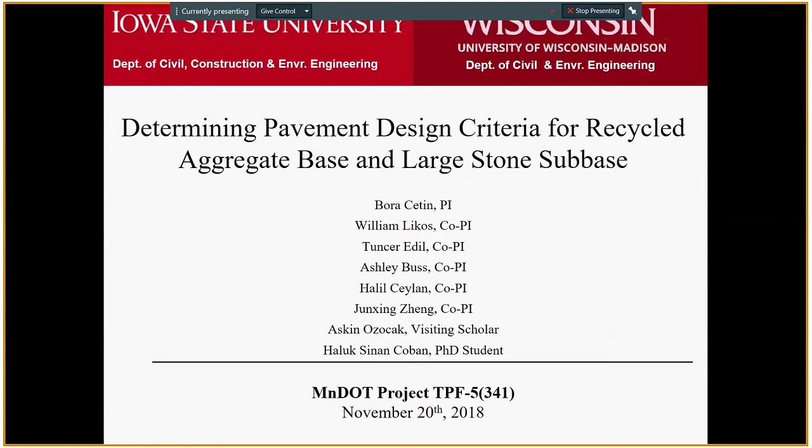Okay. All right. Thank you very much, Ben, for the introduction, and thank you very much for everybody being available. So our project is determining pavement design criteria for recycled aggregate base and large stone subbase. This is a project that started almost a year ago. By December, it will be almost a year.

This is a collaborative work between two institutions, two universities, and of course also with the NRRA group. At Iowa State University, I'm the PI of the project, Bora Cetin, and I have 3 co-PIs, Ashley Buss, Dr. Ceylan, Dr. Zheng, and our PhD student Haluk Sinan Çoban is working with us. At University of Wisconsin, we have 2 co-PIs, Dr. Likos and Dr. Edil, and currently, a couple of months ago, we also have a visiting scholar from Sakarya University working with us on this project. Again, we would like to appreciate the support of the NRRA members, our agency partners, and industry partners. We really appreciate your support and also being able to fund this project.

This is a brief outline of our presentation today. I will try to be as fast as possible. We collected a lot of data, and we'll try to digest all of that in 20-25 minutes, hopefully in 20 minutes. So we will talk about the objectives and why this research was necessary, what we have done so far, a summary of the results quickly, and what we have been working on currently.

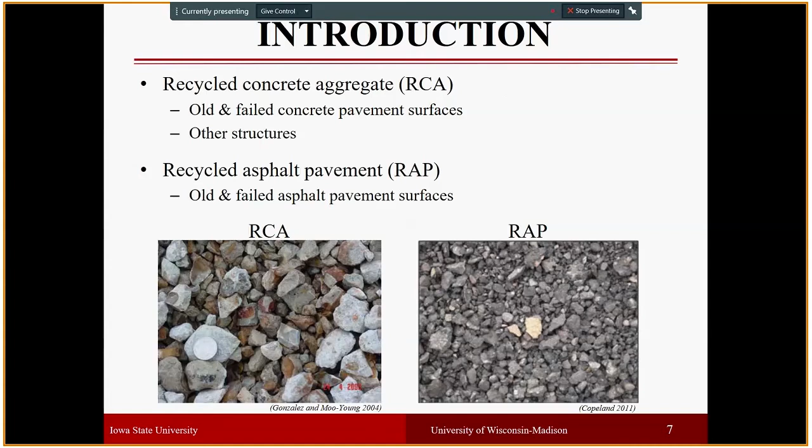Recently, over the last decade or two, large stone subbase has become of interest, especially as a subbase layer. There are currently 3 DOTs with some sort of guidelines for this: Idaho, Illinois, and Wisconsin DOTs, providing guidance on how to use large stone subbase materials. The size of these materials ranges from 3 inches to 6 inches, but there are some particles as big as 1 foot in diameter. One of the main advantages is that energy consumption decreases significantly, requiring less crushing operation as opposed to regular conventional aggregate or recycled concrete/asphalt pavement aggregate crushing processes.

As a part of this study, we had 2 tasks. Task 1 was the literature review summary, and task 2 — well, we have a total of 8 tasks.

The first 2 tasks were literature review and tech transfer preparations for recycled concrete aggregate, recycled asphalt pavement, and the large stone subbase.

Overall in the literature, the summary showed angularity of the RCA was higher, while hydrophobicity and permeability for RAP materials, recycled asphalt pavements, were higher than RCA materials.

In terms of stiffness and strength, RCA and RAP — in terms of stiffness — either provide performance equal or superior to virgin aggregates.

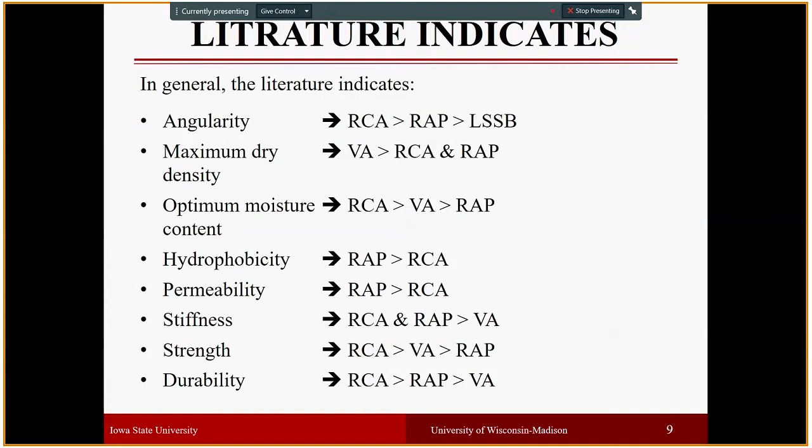I'll be happy to provide more detailed information later if there are further questions on the literature side. So the research motivation was the variability and uncertainty of these RCA and RAP materials.

It really changes from location to location, so it always requires more analysis and tests. As for limitations, large stone subbase has been studied by previous researchers, but there are still limitations because of the size.

Lab tests cannot really be conducted on these materials, and there are some inconsistencies with the design methods and construction specifications between agencies or even contractors working in this area.

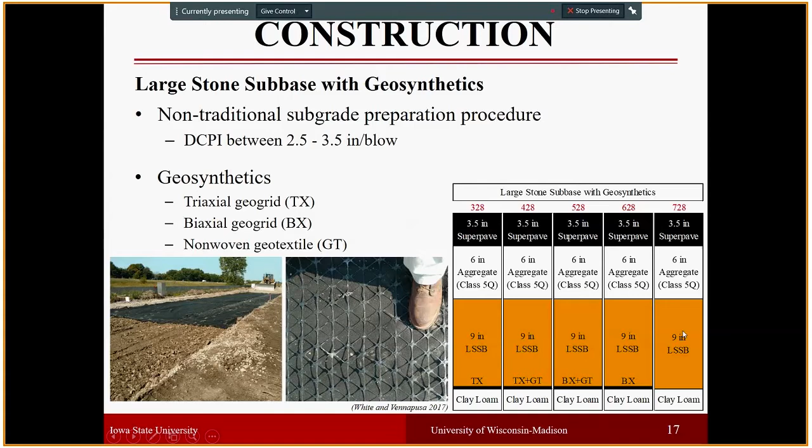We have 2 identical test sections with large stone subbases at a height of 18 inches. 4 of the large stone subbase test sections have geosynthetics installed between the subgrade and the large stone subbase layers. TX is the triaxial geogrid, GT is the nonwoven geotextile, and BX represents the biaxial geogrid. So we have sections built with triaxial geogrid and biaxial geogrid only, and combinations of these geosynthetics. The last cell has a 9 inch thick large stone subbase with no geosynthetics.

Majority of the sensors are placed in the recycled concrete aggregate bases. Cells 185 through 189 are all recycled aggregate base test sections, and we have one on the large stone subbase at the end of the geosynthetic test section. The sensors are placed on the outside lane, not the inside lanes, and we have thermocouples placed all the way up to 70 inches, which is almost 6 feet depth.

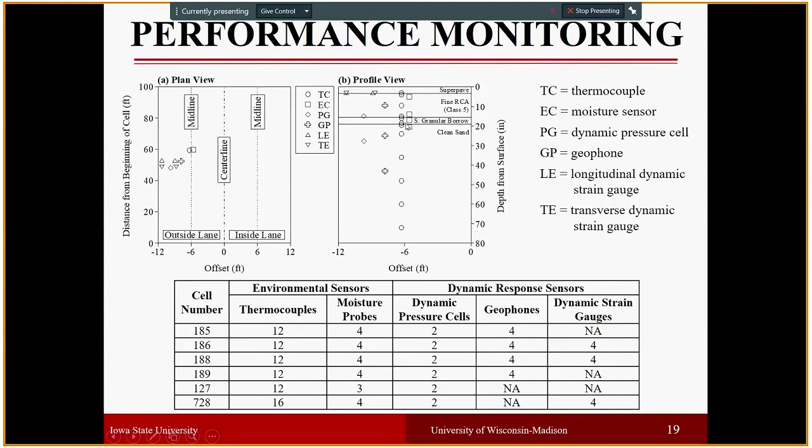The data collected so far for test 3 during construction includes nuclear gauge density data, moisture content data, DCP, lightweight deflectometer results, gas permeameter results, intelligent compaction data, and falling weight deflectometer data. I will summarize those results for the group here.

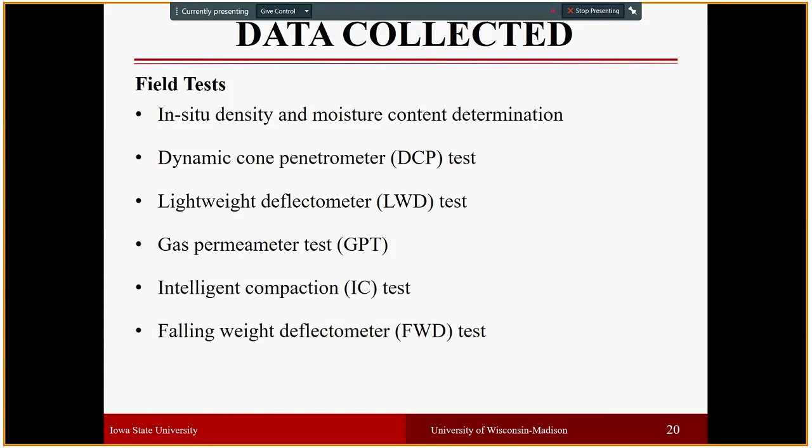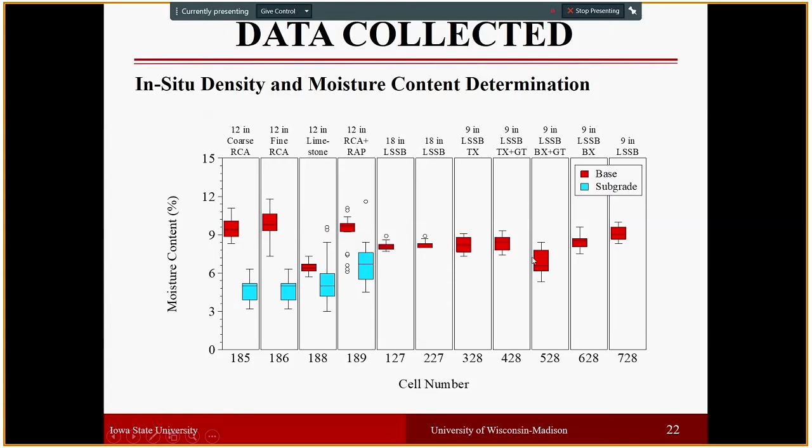For the moisture content values, the RCA-based materials tend to have higher moisture content during construction, and subgrades were compacted at lower moisture content values. The base layers on top of the large stone subbases have very close, or slightly lower, moisture contents than the RCA test sections.

We have gas permeameter test data which gives us an idea about the permeability of the base layers of each test section. Coarse RCA, as expected, had higher permeability. On the other hand, fine RCA and the Class 5Q conventional aggregates placed on the large stone subbase test sections have the lowest permeability, which is also expected.

Conventional limestone class 6 and RCA+RAP are a little bit lower than the coarse RCA and fine RCA, but they provide almost identical stiffness to the 12-inch and 18-inch thick large stone subbases. We see a slight decrease in base stiffness on the large stone subbase test sections with geosynthetics.

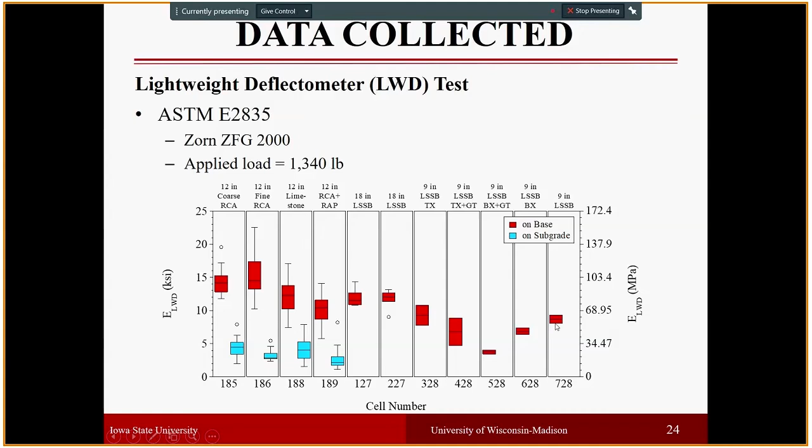The intelligent compaction data was collected by Ingios and the University of Texas at El Paso and shared with us. After the preliminary IC mapping occurred, on top of the cyclic stress-dependent resilient modulus, an automated plate load test was conducted on the test sections at different plate contact stresses.

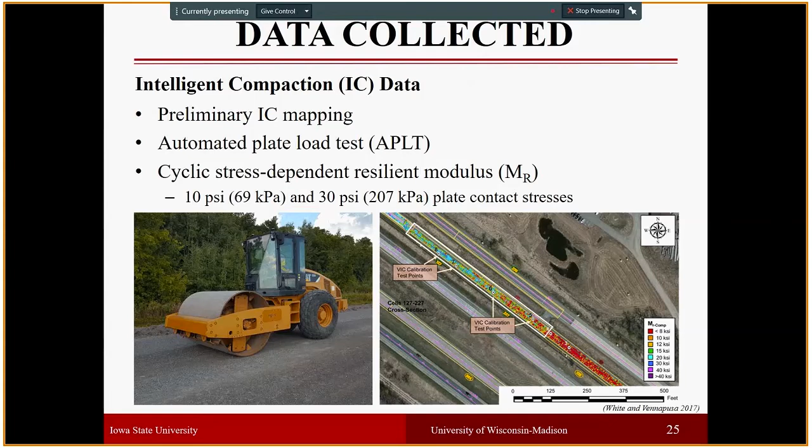The analyses were done in two ways: one composite, and one layered. In the composite analysis, we assume the entire base, subbase, and subgrade layer as one composite layer. With the layered analysis, we calculated base and subbase stiffness and subgrade stiffness separately. In the composite results, shown in white boxes, base and subbase are in red boxes, and subgrade resilient modulus data are shown in blue boxes.

Again, regardless of the analysis type we saw, the LWD results showed that the test sections built with coarse RCA and fine RCA had the higher resilient modulus values. The 18-inch thick large stone subbases, especially cell 127, provided the third highest performance in terms of resilient modulus. Class 6 conventional aggregate and the RCA+RAP mixes were very identical in their comparisons.

The large stone subbases with geosynthetics performed relatively lower, providing lower stiffness.

One thing we wanted to point out, consistent across LWD, FWD, and intelligent compaction data, is that to really see the benefit of geosynthetics you need FWD or these resilient modulus, APLT, and LWD tests. But the load we apply is not adequate to truly see the contribution of the geosynthetics, so we don't want anyone to conclude geosynthetics didn't really contribute.

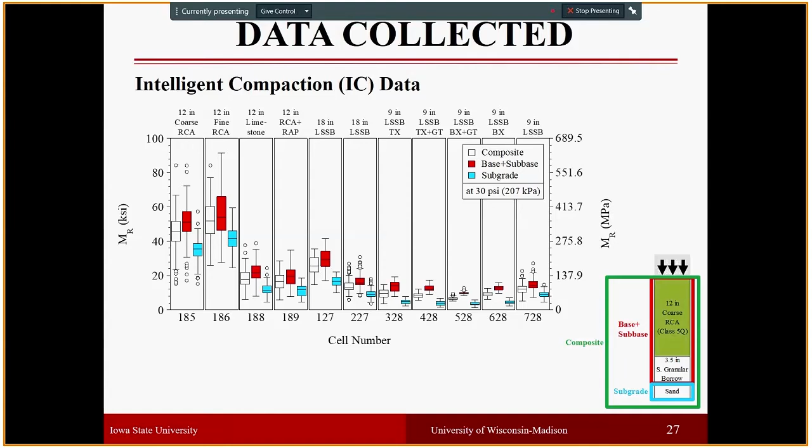In fact, geosynthetics really contributed during the construction stage, because the subgrade was too loose and geosynthetics held the large stone subbase layers pretty well intact. But to see the real contribution of these geosynthetics, we need to apply much higher loads than what FWD, automatic plate load test, or LWD tests can apply.

For falling weight deflectometer testing, thanks again to the MnROAD test facility, they have been conducting and collecting this data for us. There are different loading steps for before paving and after paving. Before paving, we did the composite analysis and also layer by layer analysis, and we conducted FWD analysis both for semi-infinite and depth to rock or water table analysis.

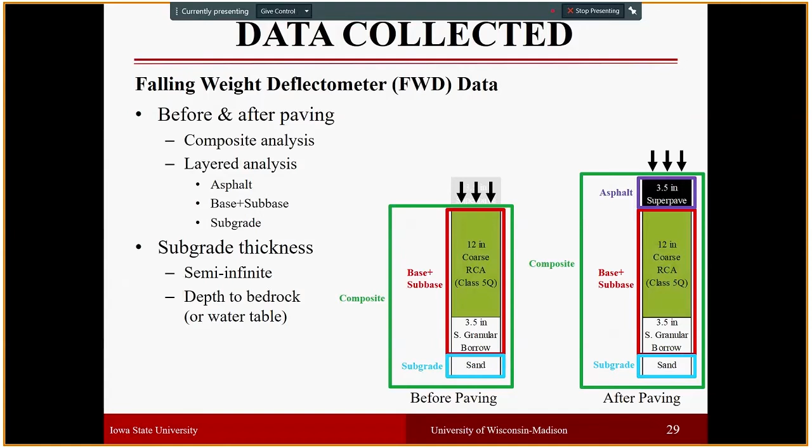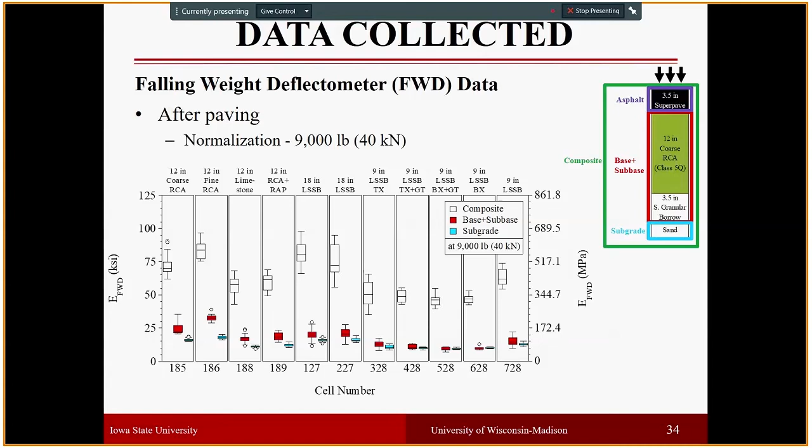Overall summary: as I described, the GPT gas permeameter test results for permeability showed coarse RCA and RCA materials overall, except fine RCA, had the higher permeability.

In terms of LWD results, fine RCA and coarse RCA were the highest, providing more stiffness than the class 6 limestone material and the 18-inch large stone subbases. The 9-inch large stone subbase test sections provided lower stiffness.

When we come to the APLT, intelligent compaction resilient modulus data, and the FWD elastic modulus data, the results compared to LWD and between IC and FWD were consistent. Fine RCA and coarse RCA provided the highest stiffness. Thicker large stone subbases performed better compared to RCA+RAP mix test sections and limestone class 6 and class 5 test sections.

The 9-inch thick large stone subbases with geosynthetics seem to have lower stiffness initially, but the paved results show it may perform superior or equal over time. Task 5 and task 6 will provide good information on that for us.

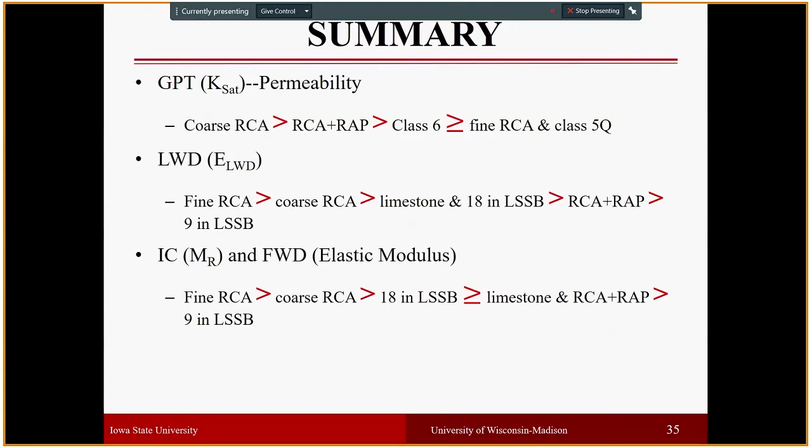Currently we are working mainly on task 4, and we are collecting the data from the MnROAD test facility for the field test results.

At Iowa State University, our main focus is on the index properties listed here, and at University of Wisconsin-Madison, we are focusing on the soil water characteristic curve and hydraulic conductivity values.

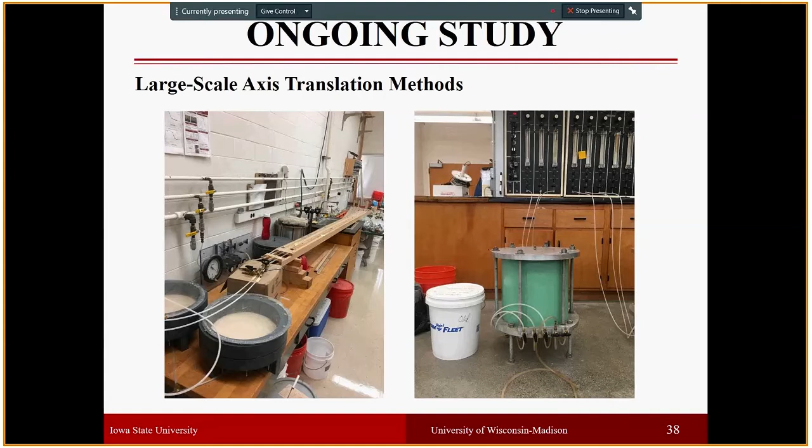This is a picture of the water retention characteristic curve tests. These are the pressure plates that will be used for some of the finer materials, like fine RCA and subgrade materials collected from MnROAD test facilities.

This is a specially modified permeameter to run constant head tests on large size particles like coarse RCA or RCA blend mixtures, which doesn't allow head losses to happen a lot.

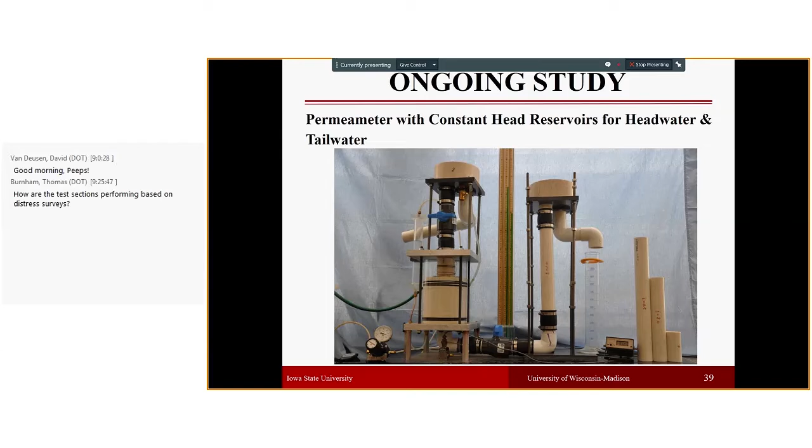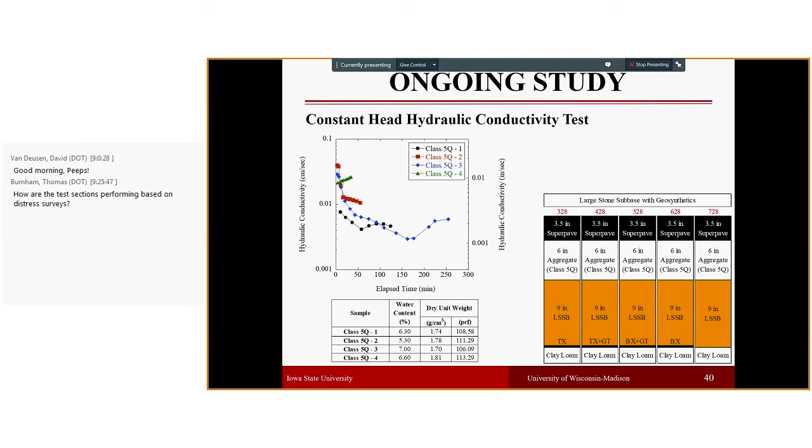So it provides really reliable permeability test results. In Wisconsin, we've finished the class 5Q permeability test results, and as you can see, the hydraulic conductivity of these materials ranges from 10 to the minus 2 centimeters per second to 5 times 10 to the minus 2 centimeters per second.

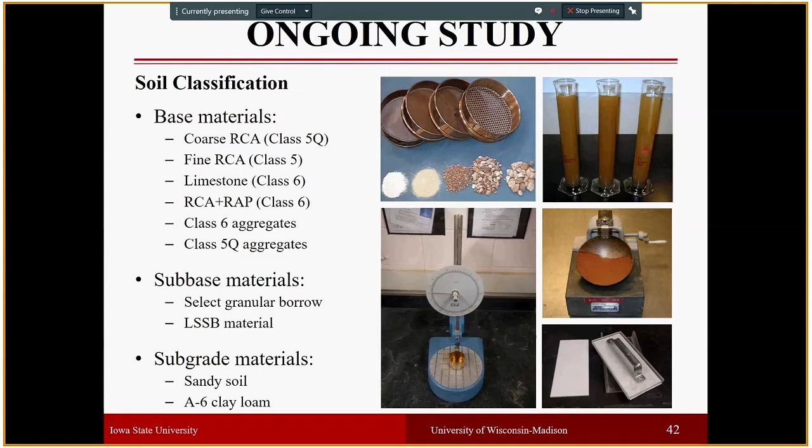We are almost done with the standard gradation tests for the materials we collected, and we're starting to do some image analysis, especially for the large stone subbase test sections first, to determine their gradation.

We are going to calculate the angularity, roundness, and sphericity of all these aggregate materials that we collected, and we will do both 2D and 3D particle shape analysis.

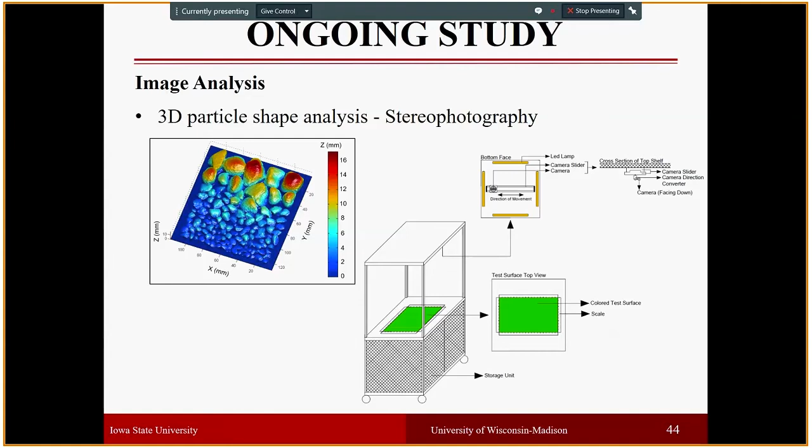This is a schematic diagram of the image station that we modified currently, and we've already started taking pictures. We hope to have that data in a month or two to show to the NRRA team.

Sorry, this is the end of the presentation. I had to go very quickly. I hope it was clear.

No, Bora, you did a great job, especially with all that material you had to cover, so thank you very much. Is there any questions for Bora out there? We've got a couple minutes here.

There's a question online from Tom: how are the test sections performing based on distress surveys? Good question—it's under task 5. We are collecting that data, but we haven't digested or summarized it yet. We are looking into the distress surveys on the pavement surfaces, but we don't have a summary yet.

After driving over this morning, I don't believe there's any cracking in any of those test sections yet. We did have some early issues where the geosynthetic was put down early on in construction, but we don't see any of that coming through right now.

So unless there are any other thoughts on that—any other questions? I guess one question I'd have, Bora, is there anything you've seen so far that's surprising to you, something you didn't expect, or is it all falling in line with what you expect for these two studies?

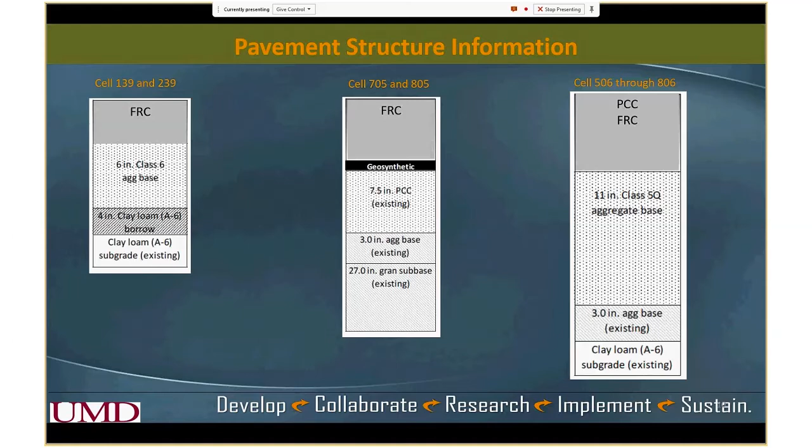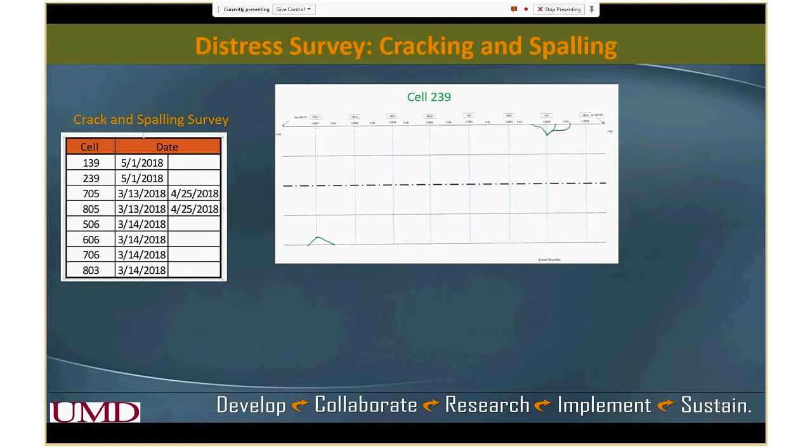When you go out and do some crack survey, and then look for cracks, sometimes you can get bored. You know, for these cells, they only noted some corner cracks, but sometimes you can have fun too.

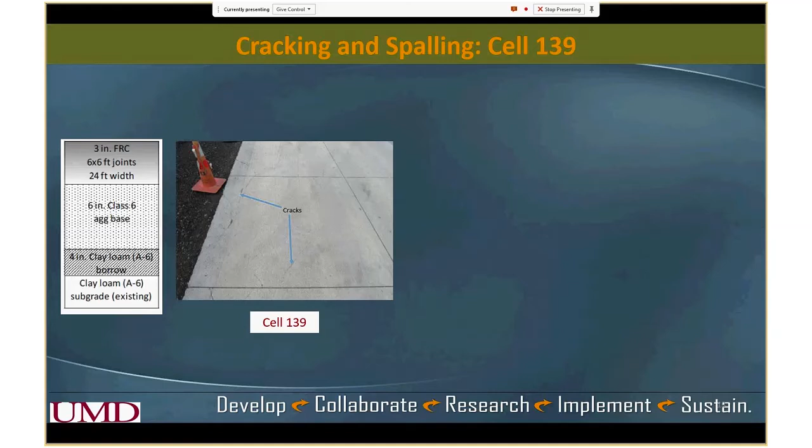So if you click, I can show the picture of the distress that we have seen in cell 139.

I'm showing the broken out area. Do you want another click after this? Yeah.

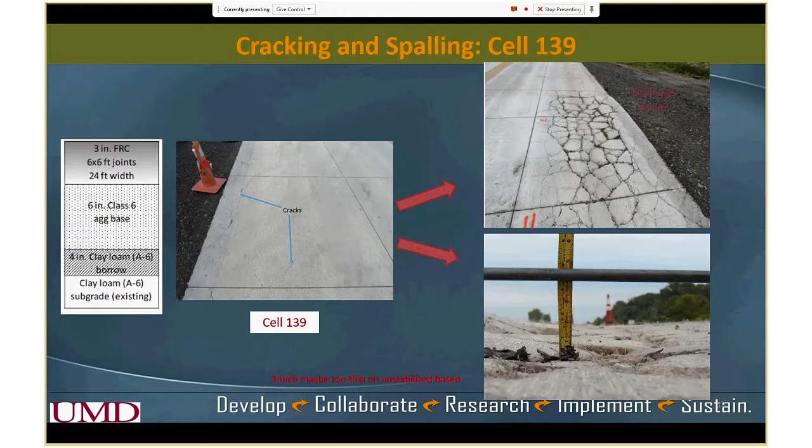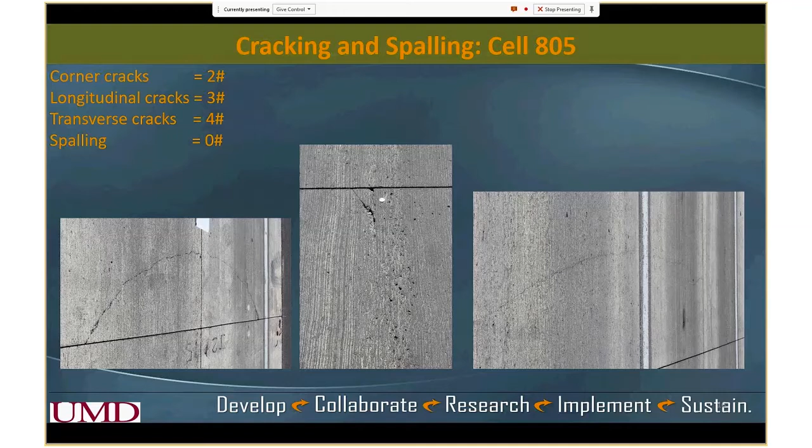All right, so this is kind of the summary. Ben, you can click a couple of times since animation is not working. So this is giving a kind of summary. So you see on 239, which I did not include 139 because that resulted in completely different distress patterns, kind of slab shatter, so I did not include that one here.

So 239, we saw a lot of corner cracks, but otherwise it's performing well. So 705, 805, they're performing kind of equally, although 805, which has a slightly smaller slab, got a little more transverse cracking, but I would still say we have to wait to understand how these perform, whether they perform differently or not. On the right side, that's what I was telling you, on 506, which is plain concrete, this is the only cell which has seen a lot of spalling, 15 numbers of spalling so far.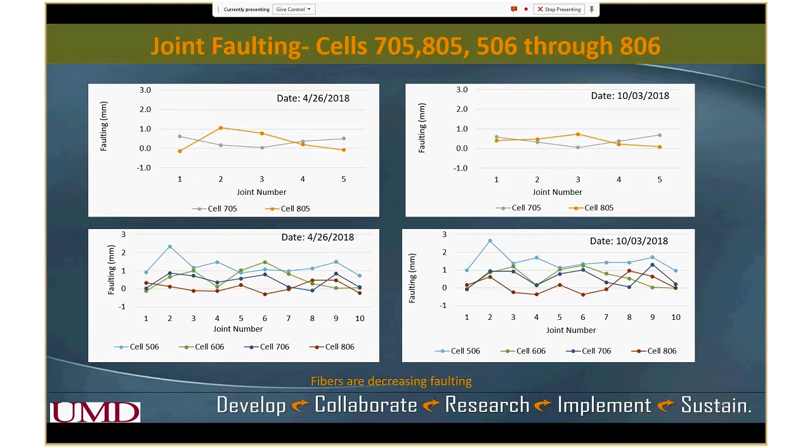Yeah, so I'm not seeing that one, but I think fiber has a great contribution in reducing the faulting. You can see 806 received really less faulting. 606 and 506, 506 which didn't have fiber at all, received higher faulting. Can you go to the next slide, please?

So this is the picture of faulting, and the next click I'm showing the graph of fiber dose versus faulting. You can see there's a kind of clear relationship here. I think this is a very good finding from the first year observation. When we did not have any fiber, we had faulting, although not too much, but with increase of the fiber, we are getting rid of faulting, or faulting is significantly reduced. Next slide please, slide number 23.

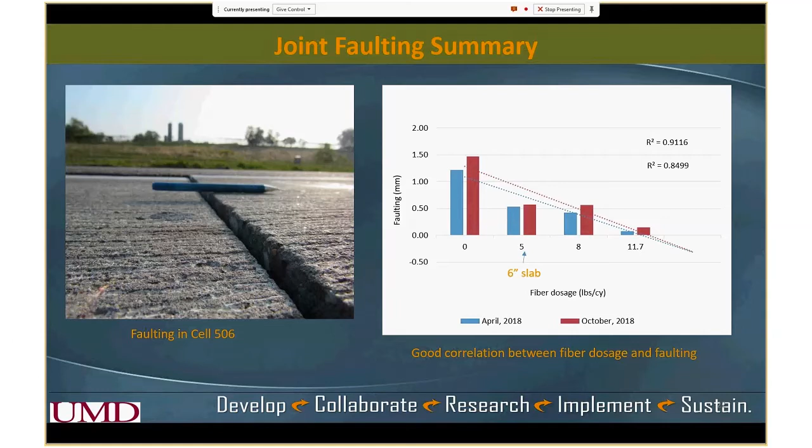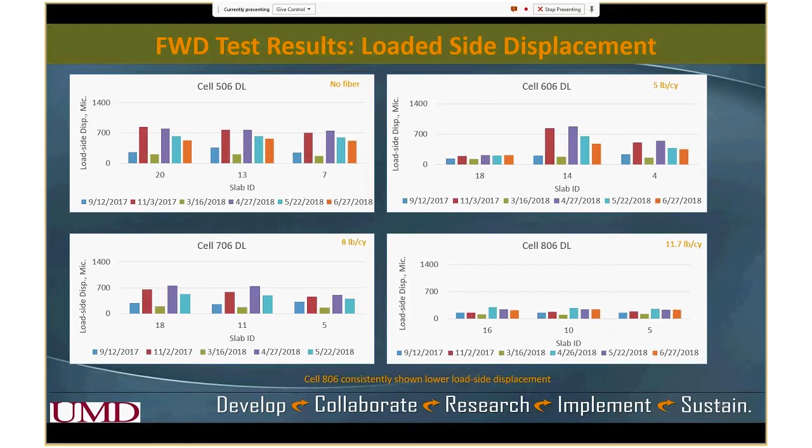Then we have also analyzed the vibrating wire sensor, or basically the strain because of environmental factors, either temperature or moisture. So we've analyzed those, correlating with temperature and all, and we already found very good correlation.

We have also analyzed joint movement data, with respect to the very first data collection day. So how joints are moving, either closing or opening with the temperature - those things we have done.

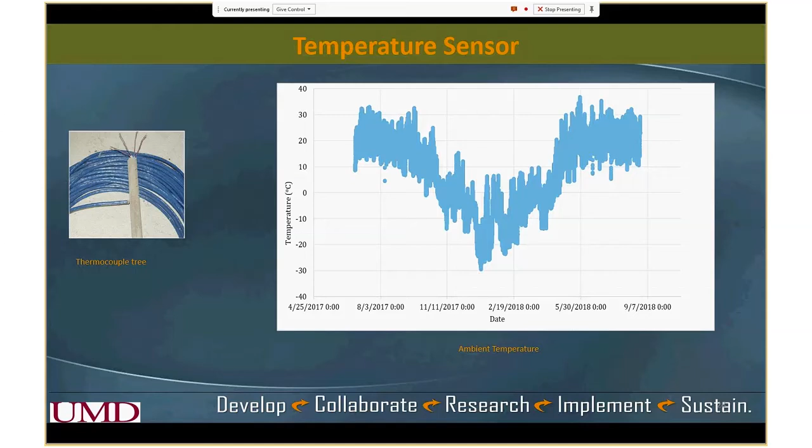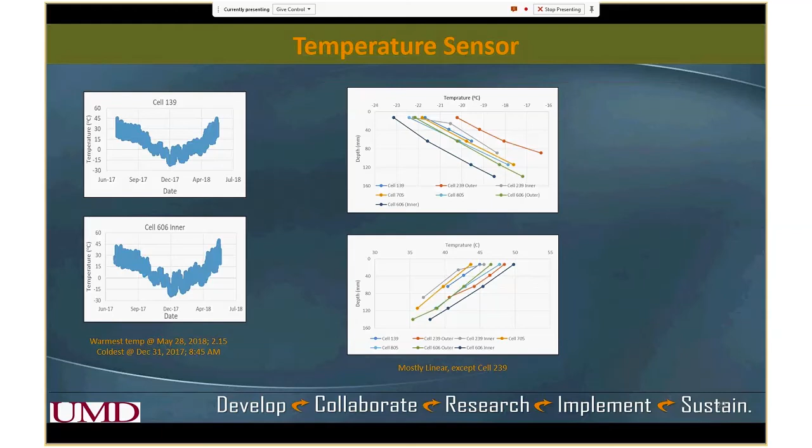We have also analyzed dynamic sensor data to see what kind of stress or strain is occurring in different cells. We're focusing on 139 to see what magnitude of strain or stress it has gotten under the load. We're also investigating some FWD data of cell 139 to find out if there was a void underneath it. I know there was a little drainage issue - the base was not super strong, so that probably also contributed to the failure of this pavement.

All right, I think this is what I actually wanted to discuss. I'm really sorry about this technical glitch, but right now I'm on temperature sensor, temperature gradient, and we got about 2 minutes left.

No, I think you're going to have to go to your conclusions pretty quick. Yeah, go to the conclusion. I already discussed what we have done with respect to the data collections.

Concluding remarks: as you have seen, fibers are really contributing in reducing the fatigue cracking. If you look at cell 806, which has the highest fiber dose, that did not have any fatigue cracking. But one observation is...

Probably the fiber that we used, if we want to use that kind of fiber, we need more of it. The cell which had 5 or 8 pound doses did not perform significantly different than the plain concrete one. But the highest dose, which is 11.7, performed really well. So we might want to try some other fibers too.

And then you have seen the faulting. I'm really happy to see how fibers are decreasing the faulting - that's the information we see from here. Also, the difference between cells 705 and 805, we did not notice a significant difference. We'll have to wait for more data.

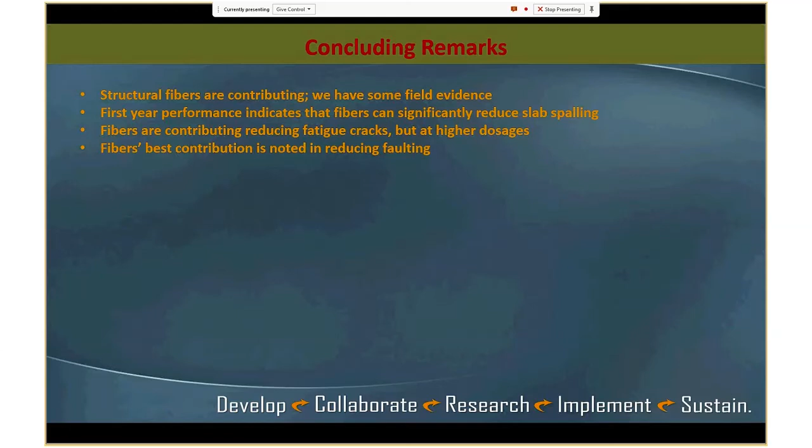So I'll take one or two quick questions, or Ben, whatever you allow. Yeah, quick question, and we got to move on to the next one. So is there any questions, Bob, you see online? There are no questions online. Okay, I think, again, Bora, sorry.

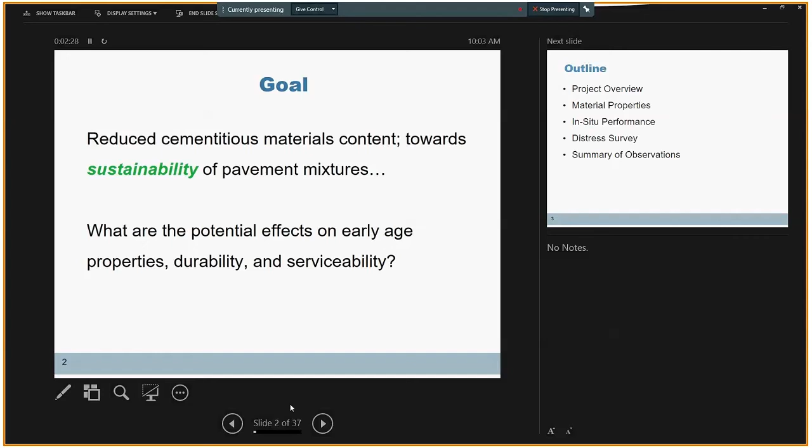Overview of my presentation: I'll give a brief overview of the project to introduce the cells, material properties, and concrete mix designs. I'll cover laboratory data from testing materials, data from in situ testing and embedded sensors, photos and data from recent distress surveys, and a summary and conclusion of the data we have so far.

The test cells we are talking about are test cell number 138 and 238 at the MnROAD facility. We had two experimental cells. Cell number 138 was prepared with 500 pounds per cubic yard of binder.

The second experimental cell, cell 238, was cast with concrete prepared with 470 pounds of cementitious materials per cubic yard of concrete. We call these cells with low and lower cement content.

The data here are compared with cell number 524, which was our reference concrete and reference cell. The concrete used for construction of this cell was prepared with 570 pounds of cementitious materials per cubic yard.

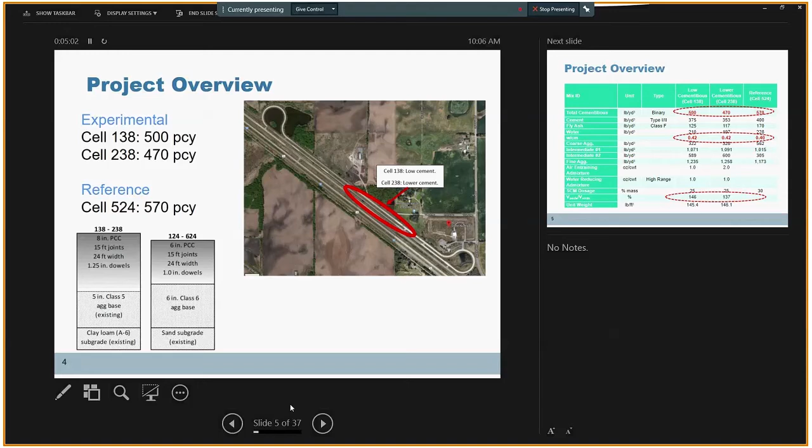Here is a summary of the concrete mix designs. Cells with low and lower cementitious material content, 500 and 470 pounds, had a 0.42 water to cementitious materials ratio, and 25% by mass of Class F fly ash.

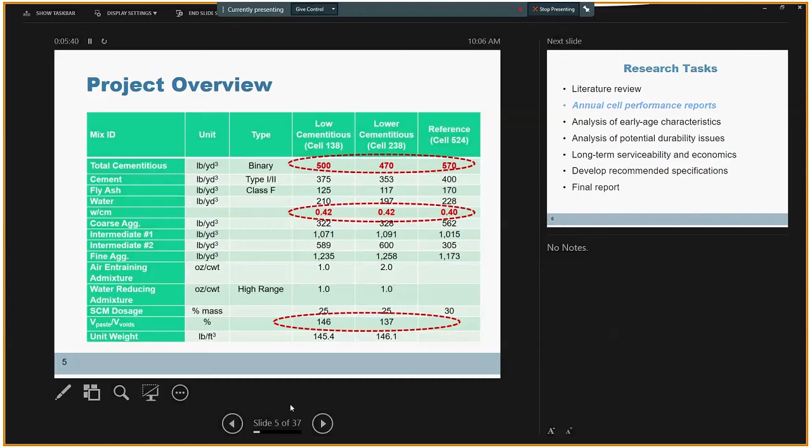The reference concrete was cast with 570 pounds of cementitious material, a 0.4 water to cement ratio, and 30% by mass of the same type of fly ash.

The research tasks in this project included a literature review, three annual performance reports to monitor the performance of these experimental cells over time, and analysis on early age properties, durability issues of these concrete mixtures, and long-term serviceability and performance. Hopefully all of these will be combined at the end of the project, forming a structure for recommended specifications to be used by MnROAD and practitioners in rigid pavement construction for use of reduced cementitious materials content.

I'm not going to go through the details of the literature review. The report was submitted in early 2018 to the Technical Advisory Committee; we received comments, improved the report, and resubmitted it. Today I'll discuss a brief overview of the annual performance report for the first year after casting these pavement sections.

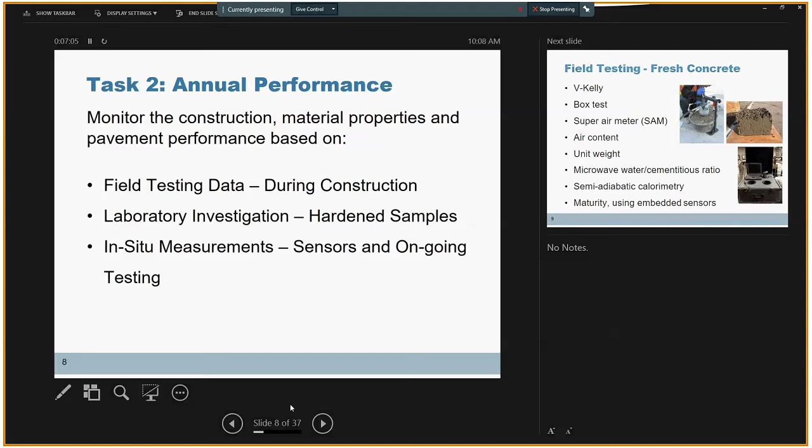I have three main categories of data to present: the field testing data collected during construction, laboratory data from testing hardened concrete samples, and in situ measurements, i.e. data from sensors, along with testing ongoing with support from MnROAD technical staff.

The fresh concrete field testing focused on workability of the concrete, air void system, water-cement ratio using the microwave test, investigating the kinetics of hydration using semi-adiabatic calorimetry, and also monitoring the maturity of the concrete mixtures.

The second category, the hardened concrete data, we had the mechanical properties, we had volumetric stability, and we had durability of the concrete to investigate.

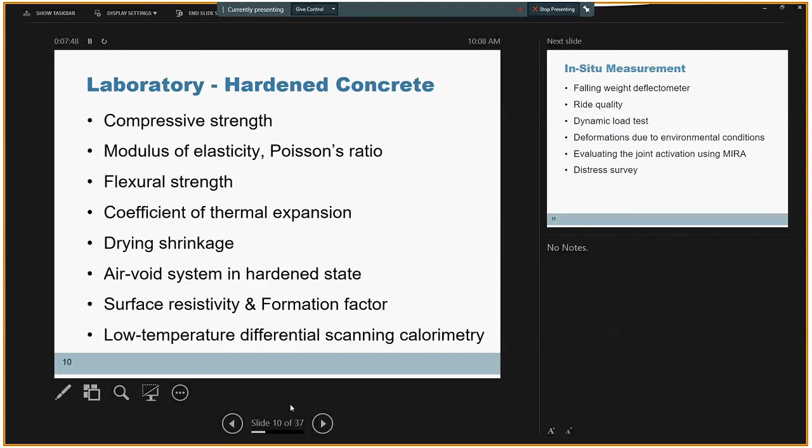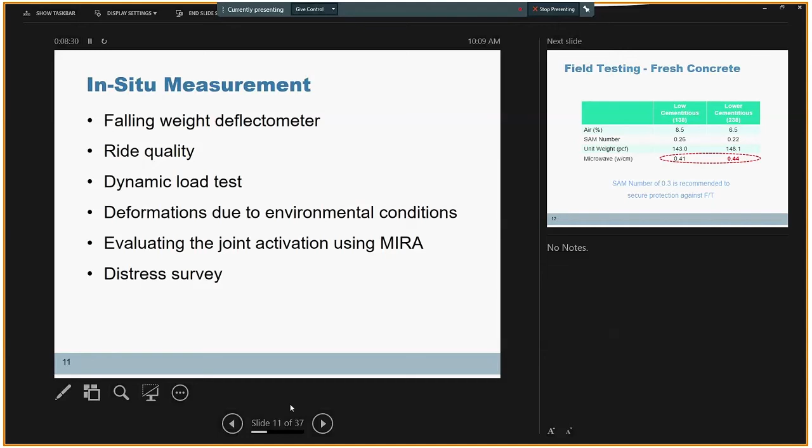The third category of the data we had was data from sensors embedded in concrete pavement, and data about in situ measurement: falling weight deflectometer, ride quality index, and data from testing the pavement sections exposed to controlled traffic loading, and also data from embedded sensors that capture the effect of environmental conditions on these concrete pavements. Also, activation of the joints and monitoring the distress in investigated cells.

Starting with the fresh concrete properties, the investigated mixtures, both low and lower cementitious material, had a proper air void system in fresh concrete. We had 6.5 and 8.5% air content in fresh state, and we had SAM numbers of 0.22 and 0.26 for these two concrete mixtures.

The SAM number, or super air meter test, provides a good index of distribution of air void in fresh concrete. In order for a concrete to have proper frost durability, we need to provide a SAM number lower than 0.3, which in this case both concrete mixtures exhibited a proper air void system.

The only issue we observed here was data from the microwave test to determine the actual water cement ratio of the concrete. For the concrete with lower cementitious material content, we observed that the actual water cement ratio was 0.44 compared to design value of 0.42.

For the workability, we did the V-Kelly test and the box test, both to investigate the response of concrete to an external source of vibration, to see how the concrete is going to react when exposed to vibration, which is a big deal for us when we are going to cast rigid pavements.

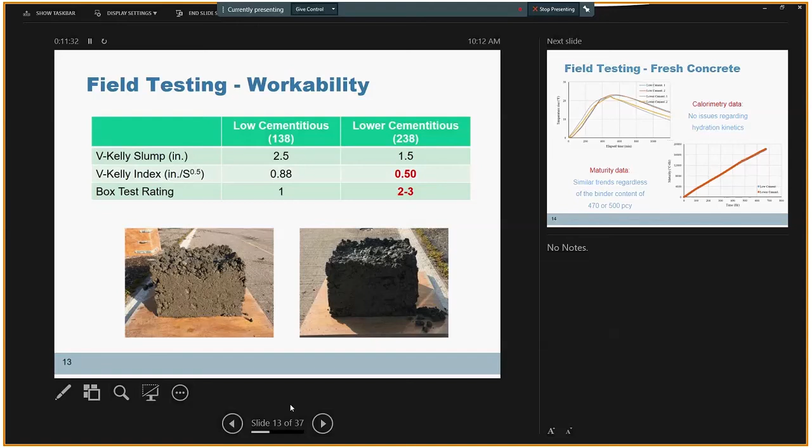The third category of fresh property testing we had was the calorimetry data and the maturity. The top graph presents the calorimetry data. We had 2 samples per concrete type, and it was observed that the concrete prepared with lower cementitious material is generating a lower total amount of heat over time during the first 24 and 48 hours of casting.

However, no significant issues could be observed here. We couldn't detect, based on the data, any potential problems with setting, delayed setting, or elongated setting time. And also the maturity data we got from the sensors were totally similar for both concrete types, regardless of the binder content.

The figure here at the bottom part of this slide is the maturity data. We see the data is almost overlapping over time for these two concrete mixtures. The maturity data was also verified by compressive strength development.

Especially at the early age, we see that both concrete types are presenting comparable strength values, and both concrete mixtures reached the minimum of 3,500 psi at 28 days.

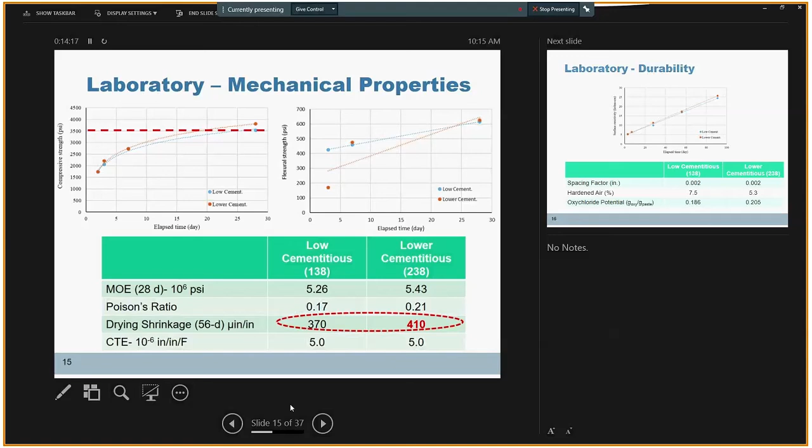However, because we had a higher water-cement ratio in this mixture, we had a slightly higher drying shrinkage value for the concrete with lower cementitious material content. Other than that, the mechanical properties were comparable for the two concrete mixtures.

For the durability data, we investigated the air void system of the two concrete mixtures in hardened state. Both concretes had a very good spacing factor, with 0.002 inch spacing factor obtained for both mixtures, which correlates well with the measurements in fresh state. With the good SAM data we had, we saw almost a 1% drop in air content in hardened state compared to fresh state, which makes sense and is what we typically observe.

The problem here was the potential for oxychloride formation. So we used the differential scanning calorimetry test method to determine the potential for oxychloride formation for the binder used in these two concrete mixtures. With 25% fly ash, we had 0.18 and 0.20 gram of oxychloride per gram of paste as the potential for oxychloride formation, which is higher than the recommended limit of 0.15.

Overall, from the material properties point of view, the mechanical properties and durability indexes measured for the two concrete mixtures were comparable. We had similar performance for these two mixtures regardless of the binder content. The main difference we observed was just the potential for workability problems with the concrete prepared with lower cementitious material content of 470 pounds.

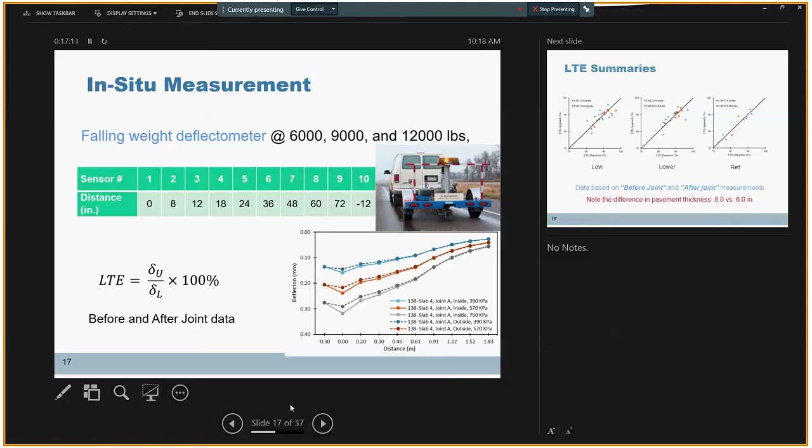In this slide, I have a summary of the LTE values we obtained for the three concrete types. Starting from the left: concrete prepared with low cementitious material content of 500, concrete prepared with lower cementitious material content of 470, and the reference concrete at 570 pounds per cubic yard of cementitious material. The blue marker points present the data obtained from the inside lane, which was exposed to traffic, and the red dots present the data from the outside lanes, exposed only to environmental loading, no traffic load.

Comparing the data for the two experimental pavement cells, number 138 and 238, we had really comparable performance for these two pavement types regardless of the binder content. The LTE values ranged from almost 80% to 95-97% for these two concrete types. It's interesting to see a slightly higher scatter when comparing the LTE values for the approaching and departure traffic on the lane exposed to traffic load. But for the outside lane, not exposed to traffic, the departure and approach traffic loads were more comparable, with less variation.

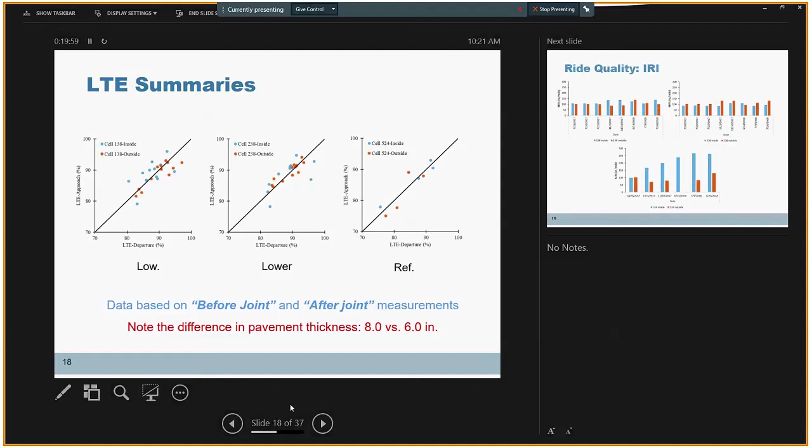A second series of data I have here is the roughness, the ride quality data. I have the IRI values, the average IRI values for the left hand side and right side of the lanes here.

The test was conducted using MnDOT's lightweight profiler according to ASTM E950, and we received data from testing at different times in 2017 and 2018, up to almost 1 year of age for these pavement sections. All three sections were cast in July 2017, so the data starts from the experimental sections from July 2017 up to July 2018.

The top 2 graphs are cell 138, low cementitious, and cell 238, lower cementitious. Again, the blue lines represent the inside lane exposed to traffic, and the red lines represent data from the outside lane not exposed to traffic. Overall, the IRI values we have here are really comparable for these 2 concrete types, regardless of the binder content.

It seems that there is a slight increase in IRI values for the second half of the first year measurements. There seems to be some increase, but we will continue monitoring the IRI values and see the trend of increase for these concrete mixtures.

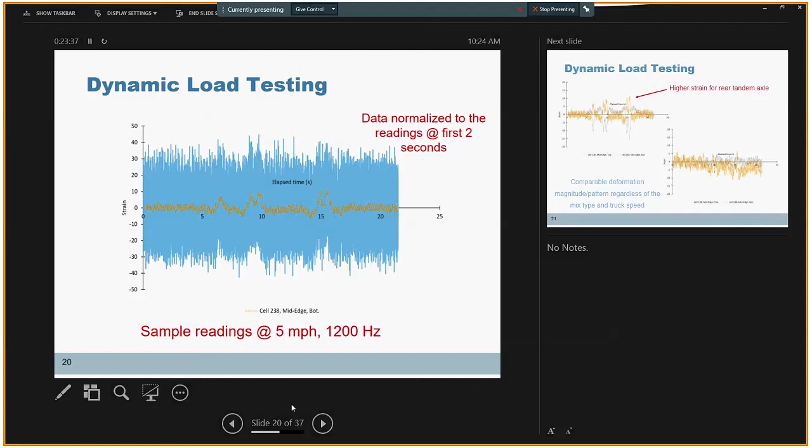Here I have a sample graph. Because of the high frequency and the nature of the test and the sensors used, there is some noise in the data. But in addition to recording the maximum and minimum strain values, we also decided to capture the trend line to show the kind of response of the pavements to controlled traffic loadings.

So here's some typical data we got from these 2 experimental cells. The top graph shows data from the cell with lower cementitious material content, from sensors at top and bottom at mid-edge of an instrumented panel. We can clearly see the loading pattern and track the axle locations and magnitude of load underneath the front and rear tandem axles.

We see a symmetric trend in strain and deformation for the top and bottom of the pavement. Overall, the sensors located at similar spots of these two pavements, these two concrete types, had comparable performance, exhibiting a similar scale of data, similar extent of deformation and strain under traffic loading. The strain captured here on average was limited to 15 to 20 microstrain in most cases during traffic loading, and there was no significant variation in trend of deformations with speed or concrete type.

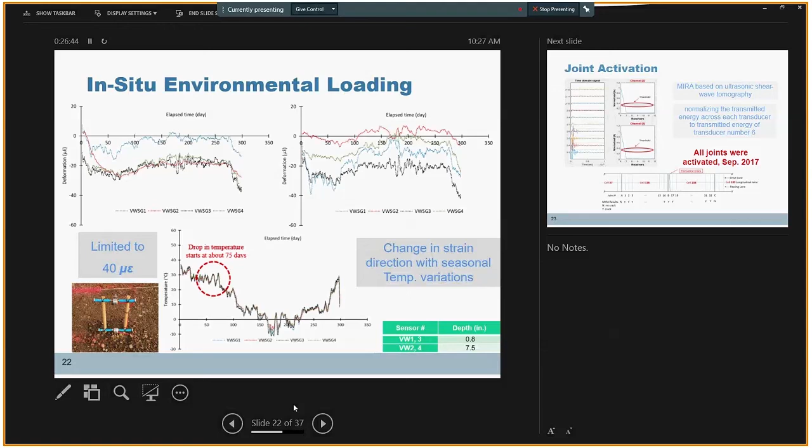Hamid, we have about 3 minutes left. Could you kind of start getting to your conclusions? You have a lot of information to share, and I'm sorry to cut you short. Sure.

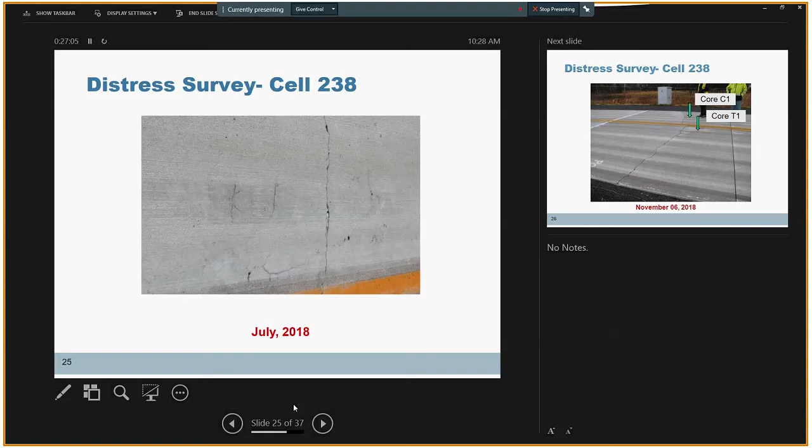I'm going to go through the distress survey. In February 2018, we noticed a transverse crack in concrete pavement cast with lower cementitious material content, and this was followed by some spider-like cracks in July 2018. So a few weeks ago, we went to the MnROAD facility, and with support from MnROAD technical staff, we took cores to investigate the reason for these cracks.

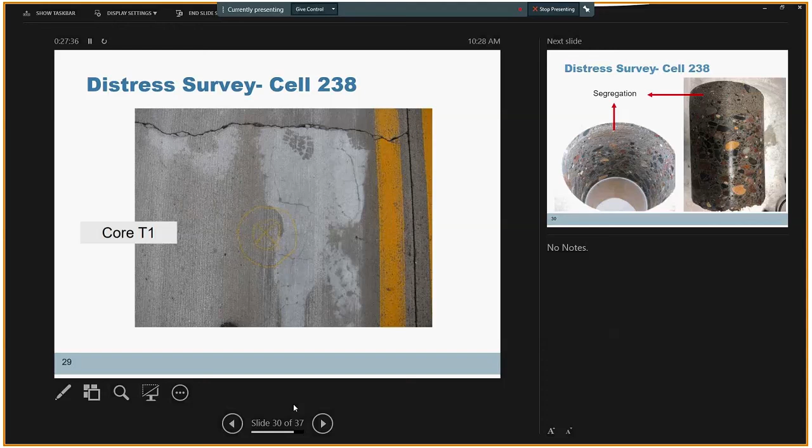It turns out that the main transverse crack we had here was due to some utility line underneath the pavement. But it was interesting to see that in one of the core locations where we had the main distress, there was a segregation of concrete, even in concrete with lower cementitious material of 470. The cores are under investigation right now. We are measuring the resistivity, and we are trying to take a look at the concrete properties here.

But this is an image of the place that we had the main distress. You can clearly see that in the top part of the concrete, there is actually no coarse aggregate to restrain the shrinkage and to control the deformation. So that led into cracking.

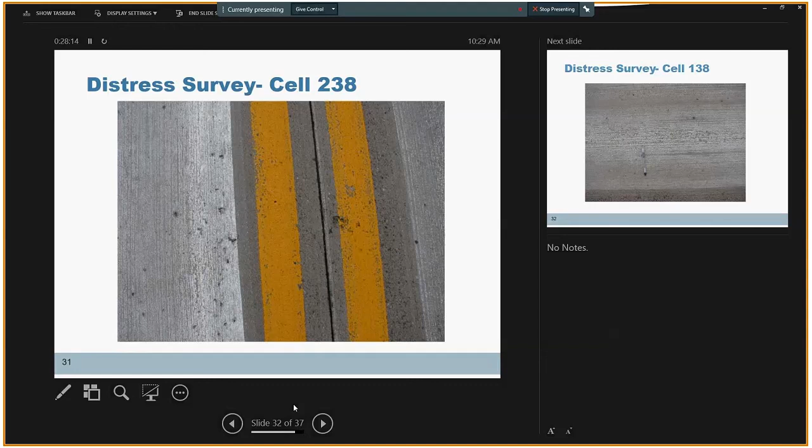There were some slight problems with finishing the surface in concrete with lower cementitious material content, which was kind of expected based on the workability data, but not such a problem in concrete with low cementitious material—excellent surface texture and excellent performance after 1 year. The only problem we had here in cell 138 with low cement was a diagonal crack in one of the cells exposed to traffic loading, which I think is structural because of the loading, not the material properties.

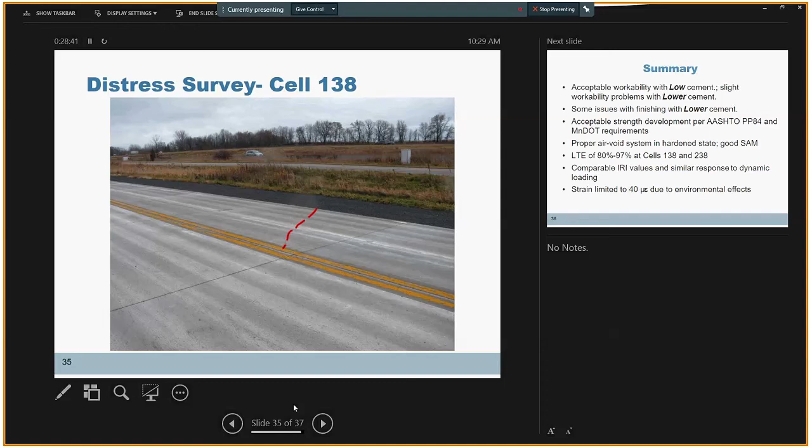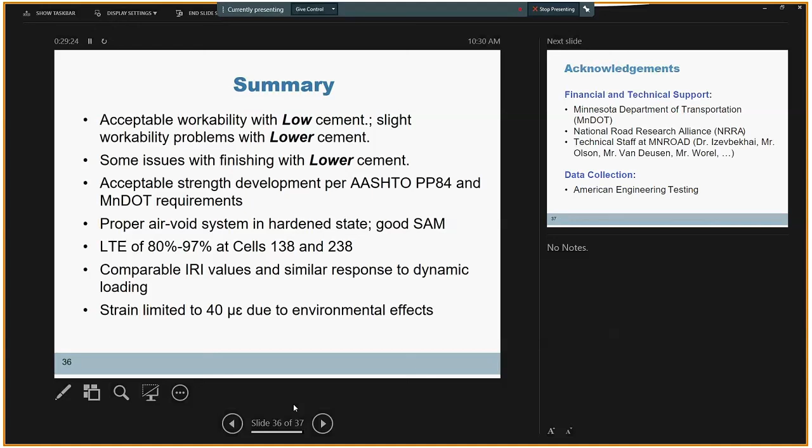So in summary, based on the first year data we have gathered up to date, with the concrete mixture prepared with low and lower cementitious material as low as 470 pounds, there were no issues with mechanical properties or durability of the concrete itself. A bit concerned about workability of such a concrete, but overall the in situ measurements suggest comparable performance with low cement at 500 pounds per cubic yard. We will keep monitoring the data and update you further. Overall, so far, both pavement sections are performing well and as expected.

At the end, I just need to acknowledge the financial and technical support provided by the Minnesota Department of Transportation, National Road Research Alliance, and also the great support provided by the technical staff at MnROAD. I should also acknowledge American Engineering Testing for helping us with data collection. With that, this is my presentation, and if there are any questions, I would be happy to take them.

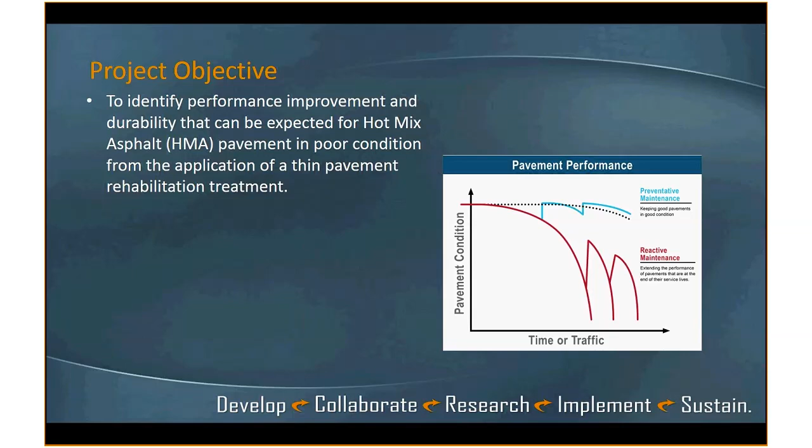So I think the states, your maintenance groups, local cities are doing these things, but they're not really doing them and tracking them, so to speak. So I think the test sections are out there. It's just finding those test sections, grabbing the data from those sections, and then really summarizing them to see what kind of performance we're getting, and are we getting value out of it?

And ultimately, are we getting any value, and what is that value? So what are the results we are getting? And then summarize those practices and compare that performance to cost. So what's the life cycle cost of doing these things when you have a pavement that's already in poor condition?

We are typically going to be focusing more on the low volume road end. I think if you're on a high volume interstate roadway, these things are not necessarily going to last. But whatever a state has in terms of data, we definitely want to include it, even if it's a higher volume. So I certainly don't want to eliminate or reduce that opportunity.

So we completed a literature review in early 2018, and our next step is to put out questions, which we did also in early 2018, back in April, May, and we've only got results back from a couple of states.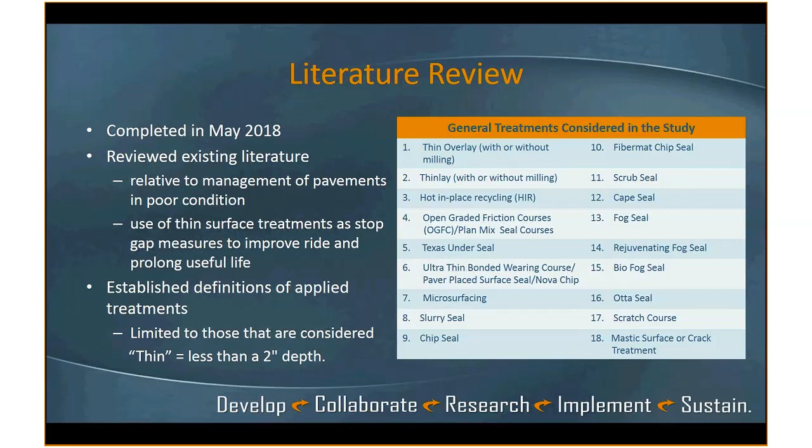So it could be patching and a chip seal, it could be a mill and a thin lay, any of those types of things. We are looking at both. And I would say even what we're looking at, we're kind of focusing a little bit on IRI.

So there was one very applicable study that's ongoing now that basically was finished, and I think you have some members working with some folks that are doing this study down in Iowa. They are really developing strategies for maintaining lower volume roads that are near the end of their service life, keeping them at a satisfactory level, and delaying that expensive rehabilitating and reconstruction.

So they're pushing that reconstruction cost off, and that really is what we're looking at here. We're looking at, in a broader sense, what other states are doing, based on existing data. We're not going to manufacture test sections from which to collect data. We're going to see what people are already doing, what they've done, and then try to summarize that. Down in Iowa, they have selected some strategies, applied them, and now they're monitoring them. I think they're actually near the end of that, but they've extended that study to do some concrete reviews as well, I believe.

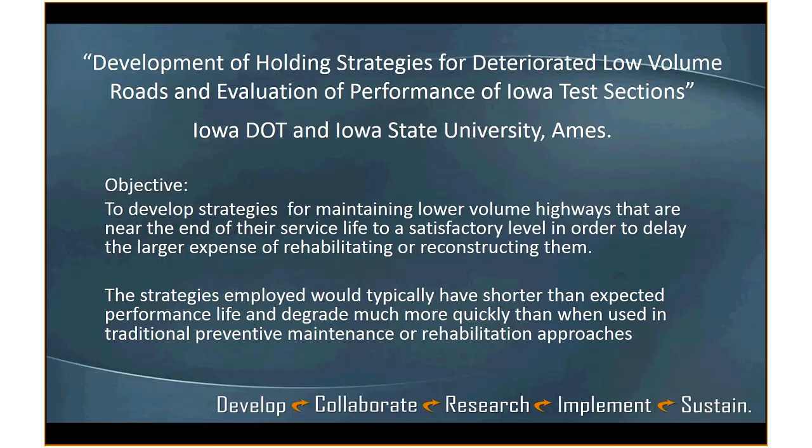So what they found, at least preliminarily in this thesis, is that these strategies—they refer to them as holding strategies because they're holding the pavement in place—can be successful more often in combination. So looking at a thin mix overlay and a surface treatment together, and they included full depth reclamation, or cold in place recycling. That isn't part of what we're looking at. I'd consider those significant rehabilitation types, but they are looking at those as part of this study. I don't believe this study is final yet—they've added a phase 2 before they finalize it, but I think they've got quite a few results that can be shared.

Their other study is a cost-effective means of managing pavements in poor condition. This was done in Wisconsin, and I think MnDOT was part of this through the National Center for Freight and Infrastructure Research. In that study, they wanted to identify treatments or materials that could extend the service life of pavements in poor condition. Similar approach—they were looking at creating tools for analyzing whether an approach is good or not, almost like a selection table: should I be doing this, and which would work best based on the conditions I have? Then they make suggestions on design strategies, more or less through a selection table.

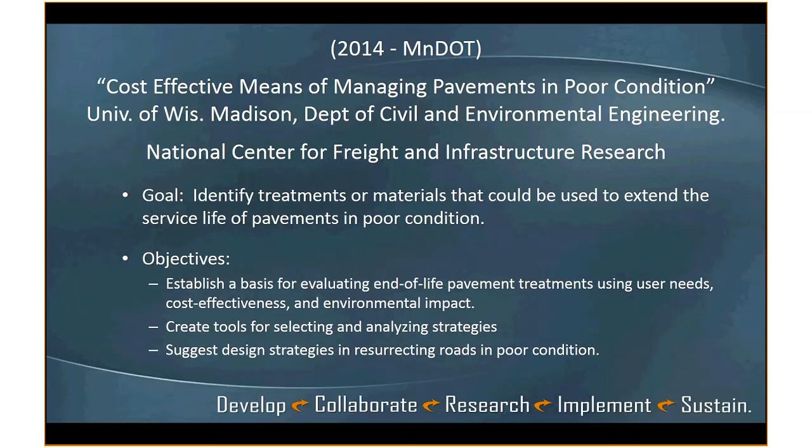So I think both of these studies—it's kind of interesting, there are states adjacent to Minnesota here where I'm at, in our region, where some of this work is being done. I did not see much else outside of those two studies that are almost identical or very similar in what they're doing. Again, the Wisconsin report focused on identifying treatments and materials, and then evaluating performance by economic and environmental factors through life cycle cost analysis. So very similar in intent.

So here's where we are now. We put out our questions last spring, April and May, and we've only gotten 2 states that have responded. It'd be good to get other states to respond, and hopefully if I can demonstrate what we've done with the data I did get, that'll spur some additional interest. It's really looking at this from a very simplified perspective, Bernard. Some of the questions for data gathering we put out in May, and we want to compile the performance data and cost data, focused on the member states. Then we're going to identify, going back to that curve, the performance improvements, the durability, and the savings—is there any kind of savings?

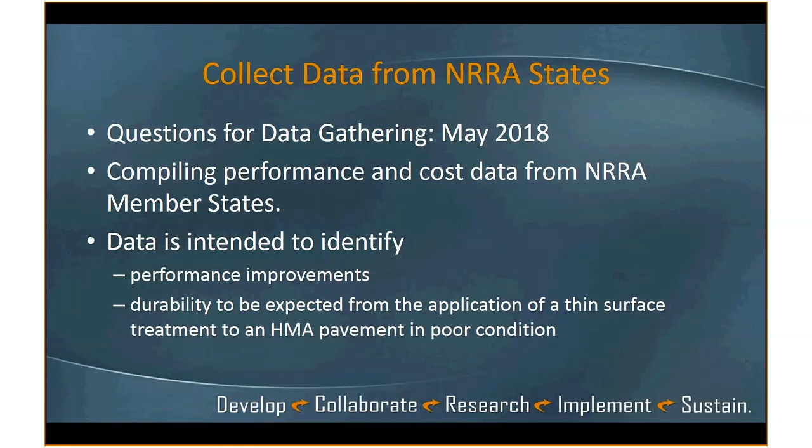So we had responses from Missouri and Minnesota. Missouri looks at their pavement management system—we're looking at what they have. They measure IRI at highway speeds and pavement distresses, rating on a scale of 1 to 10. Minnesota also uses IRI, which is pretty universal, and they have a system using the structural rating for cracking and those kinds of distresses, then summarize everything in a pavement quality index—a calculation based on visual distresses measured, with the PQI being a summation of the IRI and the structural rating.

So some of the questions we put out there: how does your state identify poor pavement? We'll come up with a standard for the states in this report, but I wanted to get an idea of how people are defining that. Missouri—I don't want to say it's a moving target, but it's adjusted for the type of road or the level of traffic and level of service expected for that road. MnDOT looks like they keep theirs pretty standard regardless of the road, and they probably take that into account in their other planning processes. Either approach is good.

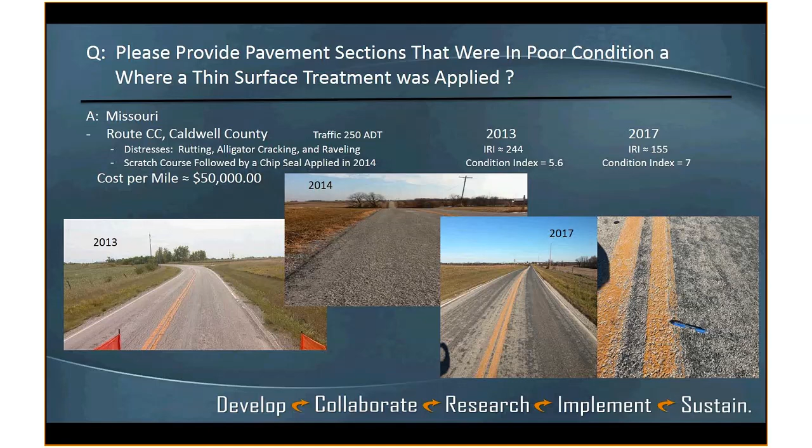And so if you're sitting looking at your budget, and you're sitting looking at your alternatives, there are some roads where you're going to say this is a great alternative. Now this is one example. It's nice to get a number of examples.

But you can see that the application dates and the Cape Seal, that's performing pretty well. You can see what the IRI was before, how much improvement they got from that application, and then how it's changing with time. And I did also want to point out we do have the traffic numbers here, because I think those are important to stratify where an application can provide a good performance and possibly where they won't provide good performance. And also the traffic levels typically might provide what the underlying structure is. Presumably the higher traffic levels are going to have probably a little bit better structure, even if it's in poor condition, but there's no guarantee of that.

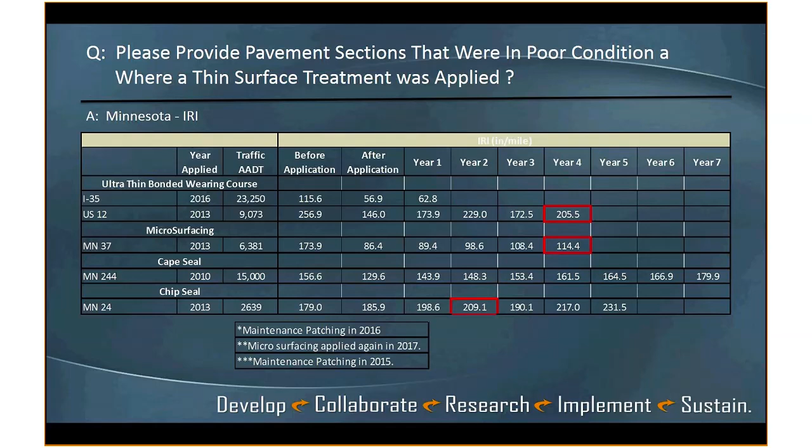So the reason I want to illustrate this is really what I think this study really is looking for. They want to get that comparison with the IRI with time and the cost effect and the life cycle cost. Did we get value out of that?

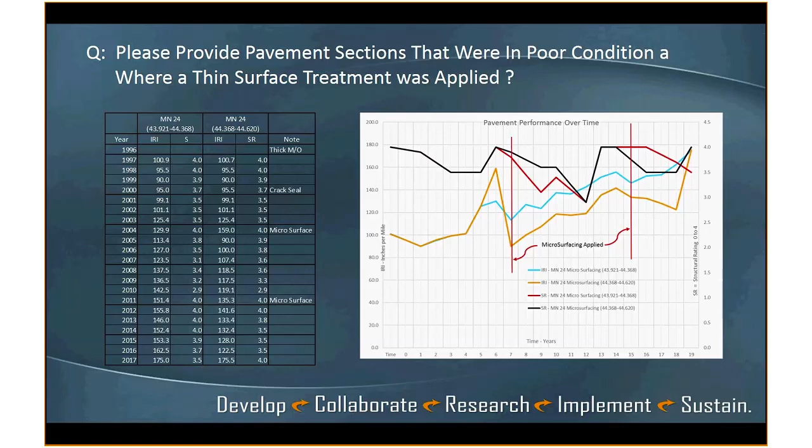I did take that IRI and calculate the RQI, and MnDOT uses this formula in their standard pavement management system, and I replotted those numbers on the scale, and then you can see I'm not sure what happened over here, but that is something to check and look at the data and find out.

This is, I believe, a microsurfacing was applied twice. It looks like about 7 years apart. So, but that's one thing to delve into and see, ask those questions ahead of time. Again, I haven't got that deep into it at this point. Hoping to get more data to kind of look at, and certainly more surface treatment types, because you get different performance from different treatment types. And but we're not really looking at necessarily in depth why the roadway was in poor condition before, but presumably it's got structural issues as well, alligator cracking, potholes, as well as maybe rutting, as well as just a lot of roughness.

So when we get this data, our focus is going to be on the initial improvement in ride quality after the application, the performance. That performance is the rate of loss of ride quality over time, and that's going to be time related, but also traffic related. We're going to compare treatments if we can.

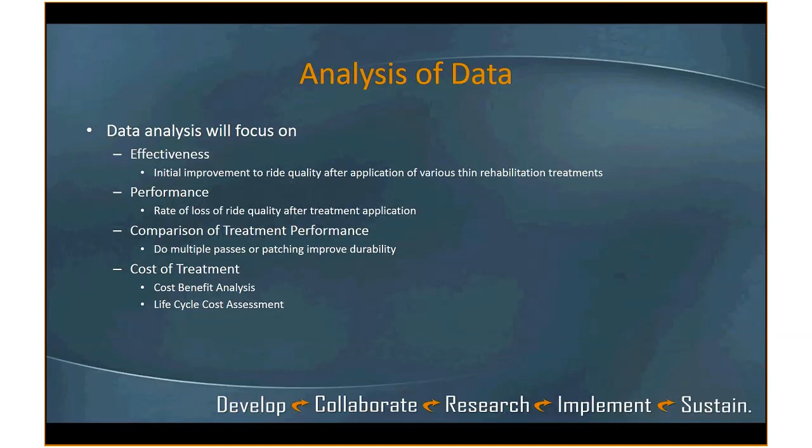We're hopefully going to have a final report in May of 2019. Again, I implore people to look and get back some additional data so that we can go with that. If we can get a half a dozen sections from each of the states, I think we'll have a pretty good grouping of data. I apologize for being short, but that's where I'm at now for the study.